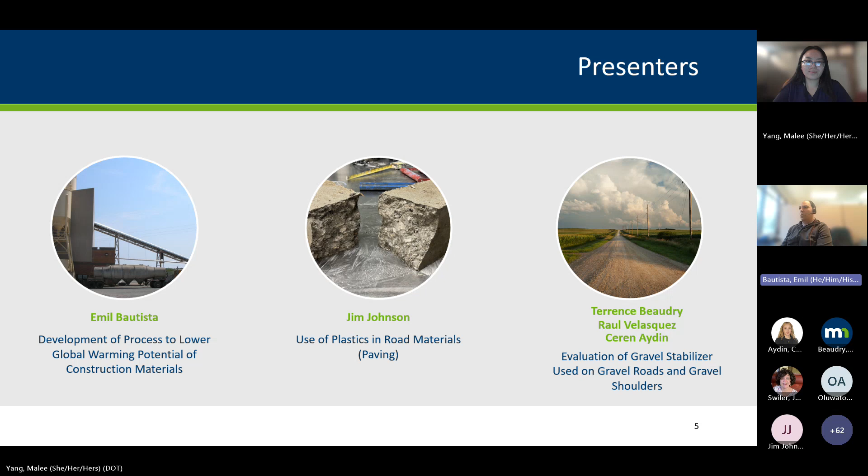Finally, we have Ceren Aydin, who is also a geomechanics research engineer at the Office of Materials and Road Research at MnDOT. Her research focuses on the mechanical and hydraulic characteristics of geomaterials, advanced geotechnical modeling, and the performance of pavement foundation and rigid pavements. Her role focuses on connecting research with practice to support innovative, practical solutions that enhance the durability and long term performance of transportation infrastructure. And with that being said, I now like to pass it on to Emil to get us started. Good morning. Share my screen.

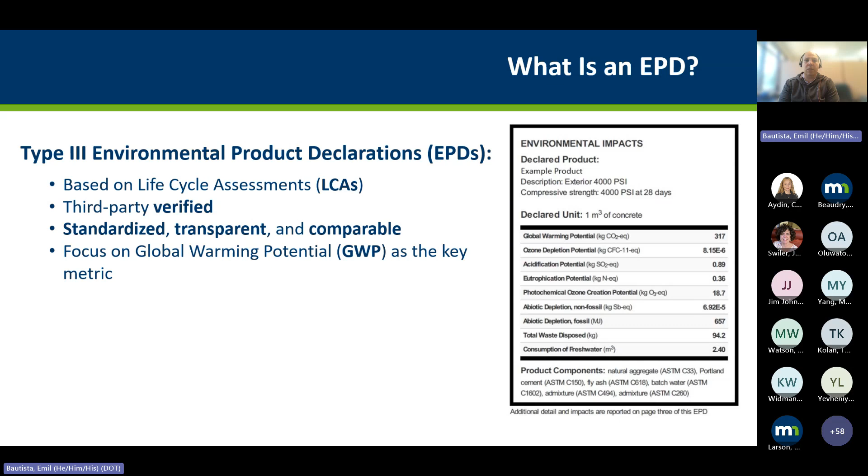It focuses on production. It looks at the constituent production, transporting those materials to the facility of production, and then producing the material. That's A1, A2, and A3.

There are other stages as well: the construction stage, which is A4 and A5. A4 consists of transporting material from the gate of the producer to the project site, and A5 is the construction operations. As I mentioned before, we are starting with EPDs, but the goal is that this can keep moving forward and looking at other stages in the cycle.

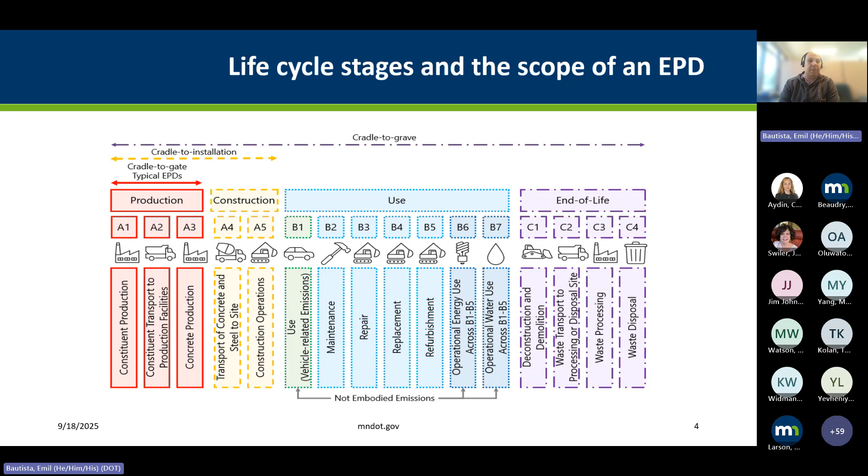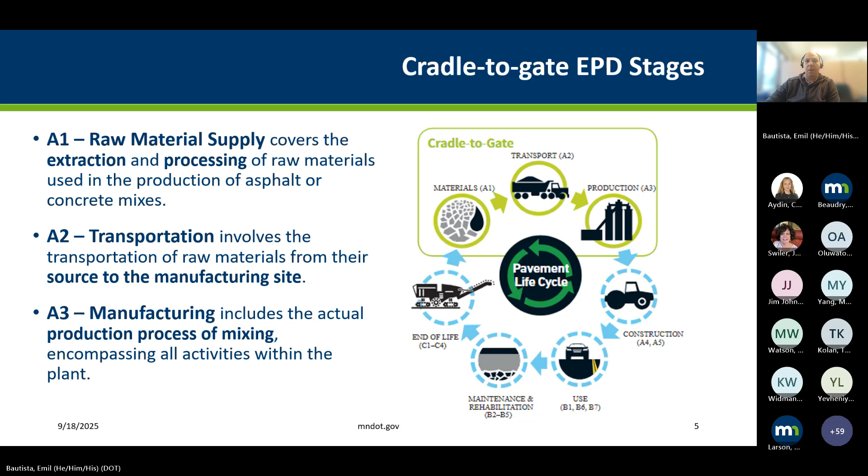So why is global warming potential important? Well, global warming potential is the most common metric in emissions reduction legislation, and is the leading indicator of environmental impact of construction materials. It is expressed in kilograms of CO2 equivalent.

For example, with methane or nitrous oxide, 1 kilogram of methane is 36 kilograms of CO2 equivalent. So what you try to do is normalize everything to CO2 measurements. CO2 and methane are what we call greenhouse gases.

Cement production is a major contributor of global warming potential. The calcination process releases a lot of CO2 when it's converted to lime, and this process leads to making clinker, which is the key ingredient of cement. Now, I don't want to put it in a way that implies it's simply a heavier global warming potential, and for that it's not good.

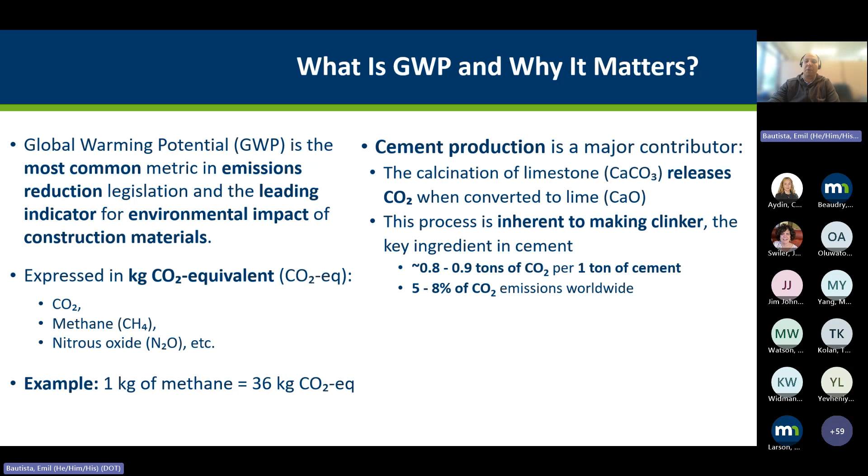Actually, what makes us also large is the amount that we use. We use quite a bit of amount to do our infrastructure, so that's another important point. And when we look at cement, for every ton of cement that we produce, we were emitting around 0.8 to 0.9 tons of CO2.

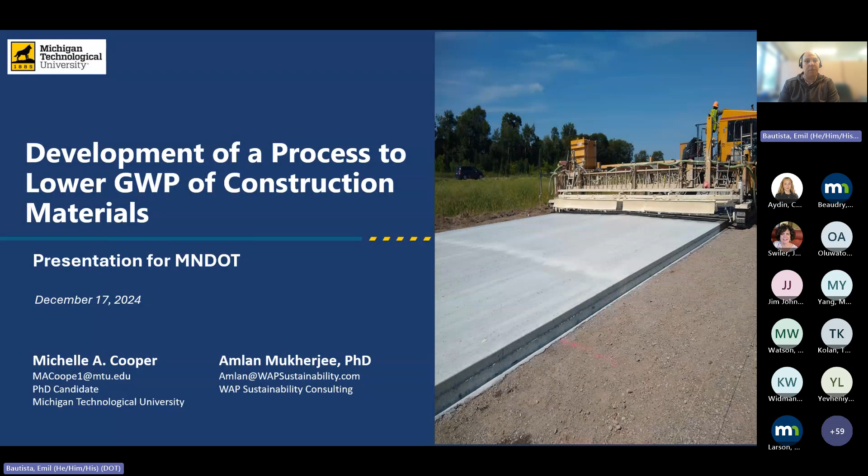Cement production is somewhere between 5 to 8% of the CO2 emissions worldwide. So that took us to do some research here at MnDOT to try to develop a process to lower our global warming potential in construction material, and start looking at how a framework will tie that with pay items. This research work is done by Michelle Cooper and Amlan Mukherjee. I'm mostly here just transferring the great work that they've done for us.

So what the project here was about was to support MnDOT's transition to low carbon concrete procurement by integrating global warming potential into project level decisions. The key objectives were to provide technical assistance for adopting well-informed EPD practice, and support global warming potential reduction targets by defining EPD acceptance criteria and looking at regionalized incentive thresholds.

It also looks at connecting EPDs to MnDOT's existing incentive systems. The scope of work was to propose a framework that will allow us to tie global warming potential into our procurement workflows, and be able to align with the Minnesota Buy Clean goals as well.

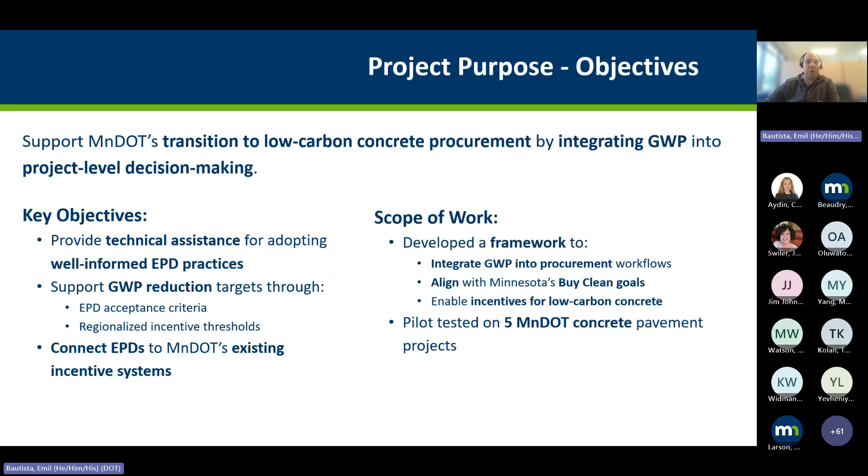During this process, we were able to pilot test on 5 MnDOT concrete pavement projects around the state. We were able to also accomplish some other important things with this research. We were able to collect around 850 published EPDs relevant to Minnesota concrete.

This research project also analyzed 32 MnDOT approved concrete mixes, collected data for A1 to A5. I want to make the note here, EPDs are A1 to A3, but we're looking at collecting also A4 and A5, and I'll explain that in the next slide.

Data from 5 real world projects, so we looked at 4 reconstructions and 1 joint repair. This helps us develop a life cycle information model to estimate and map global warming potential, also perform benchmarking analysis to establish those limits, and create a few tools that allow us to work with implementation of this research.

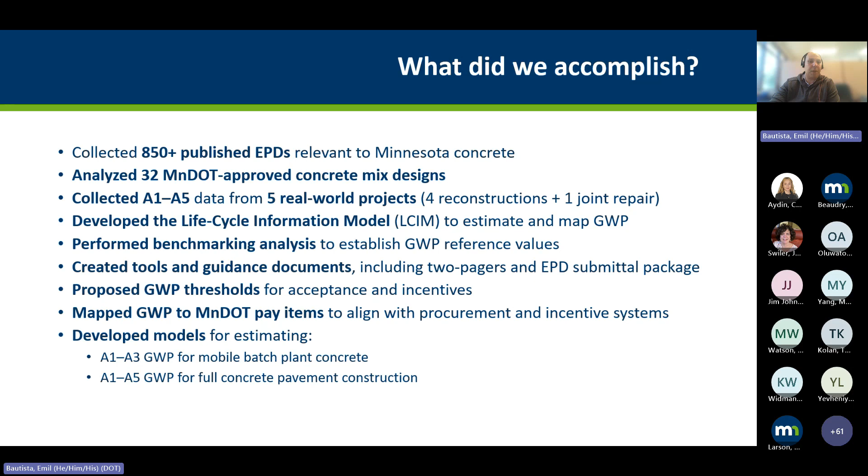Those are the 2 pagers and the submittal packages. We also have a proposed threshold for acceptance and incentive, and have mapped GWP to MnDOT pay items to align with procurement and incentive systems. We also developed models for estimating A1 to A3 for mobile batch plants, and A1 to A5 for global warming potential for concrete pavement construction.

So why am I talking about A1 to A5 now? When I said very clearly EPDs are A1 to A3, well, it's very simple. When we do our infrastructure, we don't necessarily procure a material. For example, for concrete, we pay for the placement of concrete.

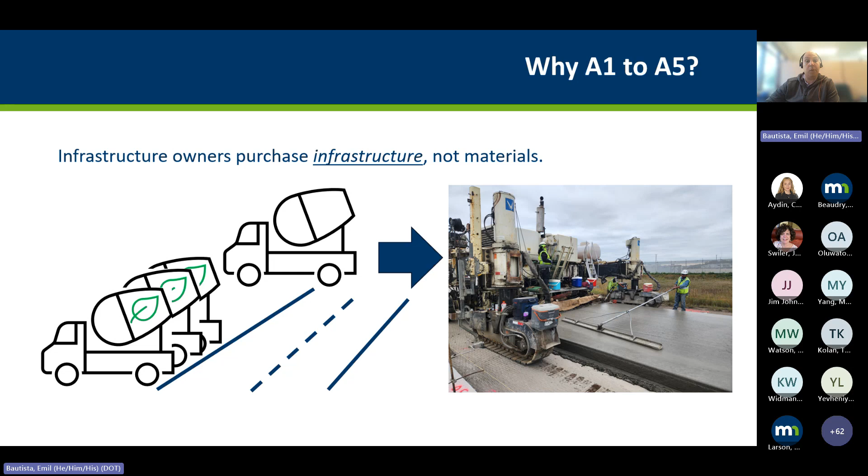So we want to be able to track as well the amount of emissions that are emitted in the construction process, in taking that material from a plant to a project site, and the amount of work that has to be done on the project site with equipment and other things, and estimate those emissions. Our legislation does not require us to do that, but we want to start looking at how that will look because of how it is tied into the way we pay for work.

These two pagers, you can find them on a website. There's a very nice website that they created with a lot of resources in there. You can find introduction to EPDs and any other resources. Some of these resources are coming from the federal government. I know now some of those websites might be inactive, but I think some of them are still accessible.

You can also look at Minnesota benchmarking efforts, those initial efforts, and look at what they propose for global warming potential acceptance and incentive thresholds. Like I mentioned before, they estimated what is the emissions of A1 to A3 for global warming potential for mobile plants, and A1 to A5 for concrete pavement construction.

The big part of this is looking at how can we integrate this EPD collection into procurement. So the EPD submittal package is just helping us ensure a timely and consistent environmental data collection to support benchmarking decisions.

One of the things they recommended was to maybe look at requesting this document two weeks prior to material delivery, or at the end of the project or at the end of each calendar year. This is something we're working with industry on. In the special provision language we're putting together, we're actually looking at a timeframe of 12 weeks after placement, just to get going and collect as many EPDs as we can in this initial stage. Some implementation notes recommended having a separate project line item, so there's an EPD collection type item in the contract, with information that can later be used to develop and regularly update benchmarking for threshold decision making.

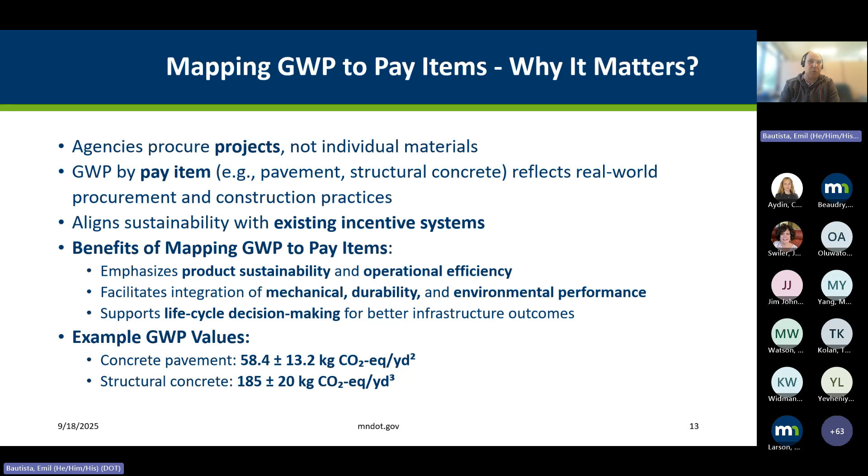So some of the key findings from this report, and some important mobile batch plant insights we got: at the A1 stage, the dominant factor is the cement - like I said before, we know that worldwide. A4 and A5 stages can add around 17% to the total global warming potential. We did not find any correlation with water cement ratio and GWP, which is a very important finding because water cement ratio is a quality assurance measurement for us internally, and we do have some incentive tied to water cement ratio requirements.

Also, the global warming potential can be different for different scenarios - mainline paving, a turn lane, or a joint repair - so we need to start looking more into those types of projects. We also have mobile plants in the state, and I've found a good amount of our producers have those types of plants, so they can be higher and more variable than ready mix production. A1 to A3 could be up to 66 kilograms CO2 higher, and the ready mix threshold limit may not apply. So we need more data from mobile plants to create specific benchmarks for this type of plant in the future.

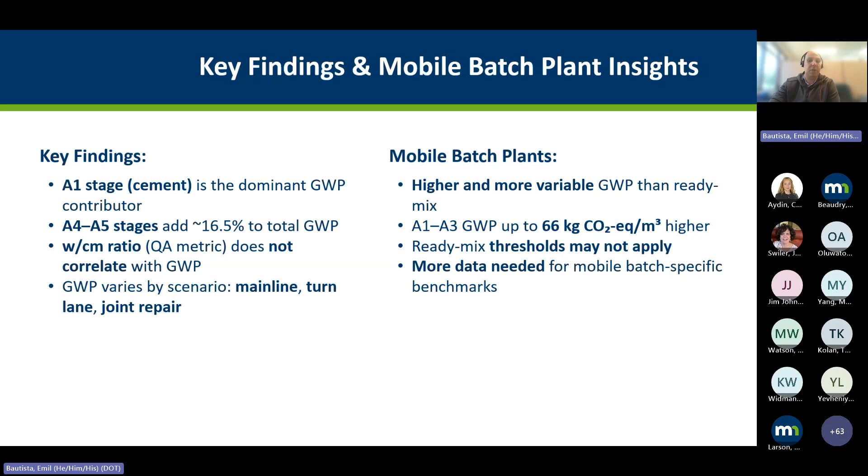Some other things we got were stakeholder concerns and future needs. From the producers and contractors side, they showed concerns about how we're collecting the data and where we're storing it, because they have mix design data tied to those documents and feel this could be proprietary data they don't want openly shared. So we're looking at ways to tackle this - how do we have a good procedure or process to collect data and store it efficiently?

We have to integrate this into spec and our quality assurance system, and incentivize recognition of mobile plant variability. They also expressed concern about how we handle mix changes, since they happen in real time. So we're working through those things with industry to make the needed adjustments to collect this data, and also trying to define what a minimum project size or EPD requirement could be.

So for the future, we need more information on mobile plants and precast concrete. We're looking at doing benchmarks by functional classes, like other states have done. They also recommended looking at an audit program for EPD verification and integrating quality assurance and sustainability data systems.

This work aligns very well with the Buy Clean strategy of the state and the direction we're taking. It supports Minnesota Buy Clean pilot projects and also provides a regionalized, data-driven framework and builds capacity for future GWP-based procurement. It supports the legislative requirements to set GWP thresholds by 2028, applying to concrete, asphalt, steel, and rebar, and allows us to lay the technical foundation to be in compliance with the state law.

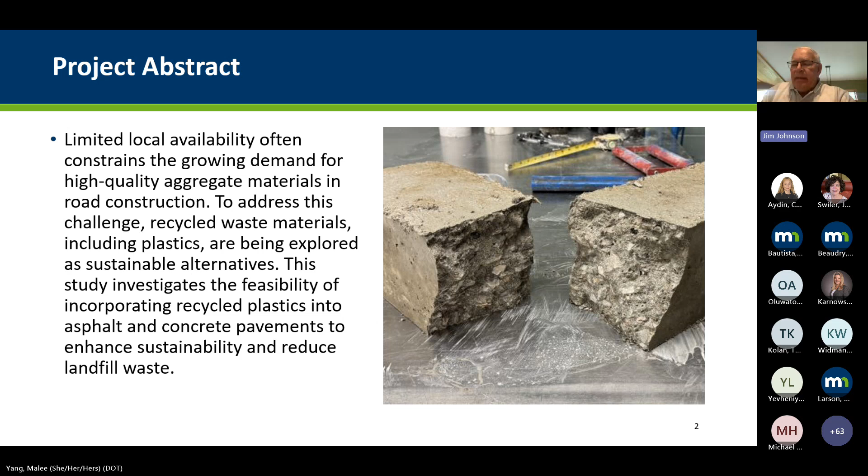Going through the objectives of this study: to survey the use of recycled plastics for roads in coordination with literature research, other studies, field investigations, or infrastructure projects already doing this. This study is hopefully just the next step in progressing towards utilization of recycled plastics into our asphalt and concrete pavements. Bullet number 2 is to evaluate the feasibility of using plastics in paving mixtures, and to work in partnership with MnDOT, since MnDOT provides a lot of the standards we used in this study in terms of specifications and mix designs. So again, work in partnership with MnDOT to provide a summary of the work being done both locally and within the pool-funded studies, which are studies being done elsewhere, both nationally and internationally.

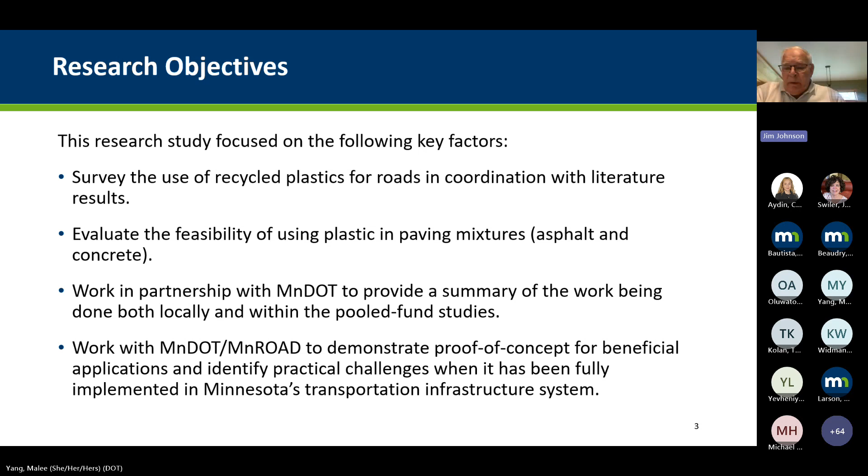Hopefully in the process and in the future we'll continue to work with MnDOT and MnROAD to demonstrate the proof of concept for something economical and beneficial both environmentally and cost-wise, to save some of our virgin aggregates or be able to replace them in the future.

The second chapter of this final report talked about the summary of the use of recycled products. What I want to share here, just very quickly, are the different types of plastics that are in major manufacturing and use in today's economy and our worldwide use of this.

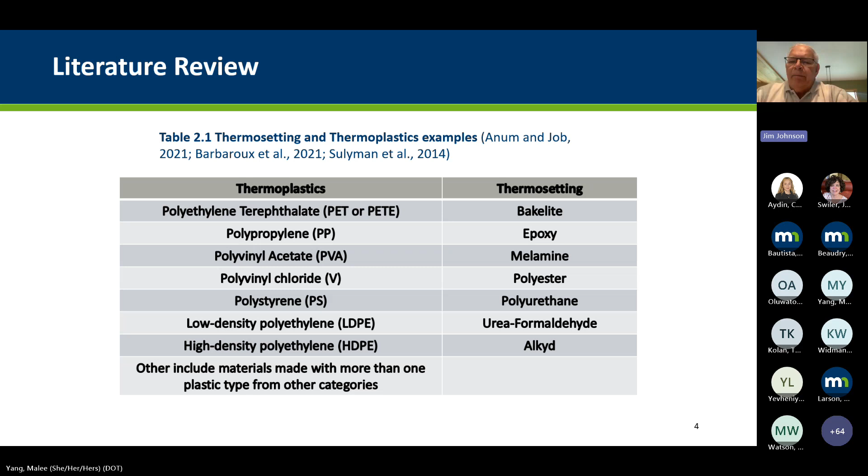If you'll pay attention, because it will appear in some of the following slides, I always have a problem with acronyms. So here you see whether it's PET, PVC, PS, or LDPE, just so you have a reference back as to what those acronyms actually stand for. Just showing a portion of the large variety of plastics, thermoplastics and thermosetting that are available on a worldwide market. Next slide, please, Malee.

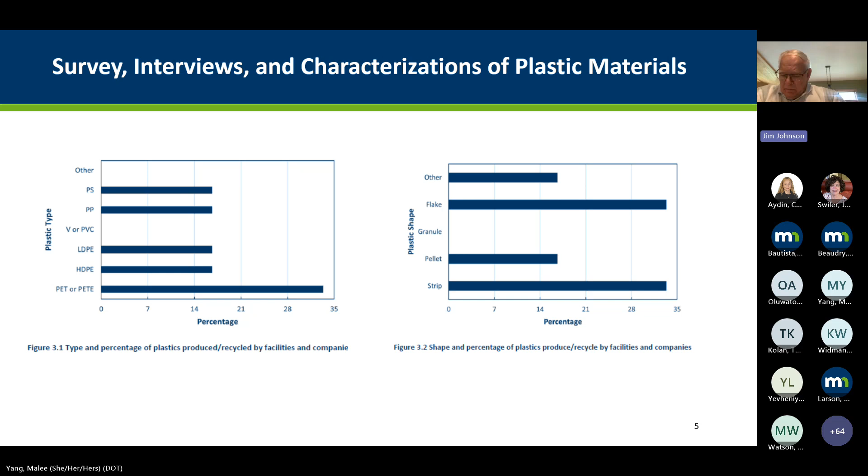Let's see, next slide please, Maylee. Chapters 4 and 5 that we'll be going to now are really the crux, or the feasibility study, of the study. Chapter 4 is on the utilization of plastic waste in asphalt paving. Then as we go on to chapter 5, which I'll get to in a few slides, we'll focus on the use of those plastic wastes in concrete material as well.

They analyzed in the study, though it doesn't show up in what I'm presenting this morning, both a dry process, which is introducing each of the materials, the aggregates and the bituminous, in their separate components, more like a batch plant bringing in each of the elements of the asphalt mix, as opposed to a wet process where the plastics are introduced into the bitumen mix, which already includes the aggregate. For this testing and study, they utilized the wet process.

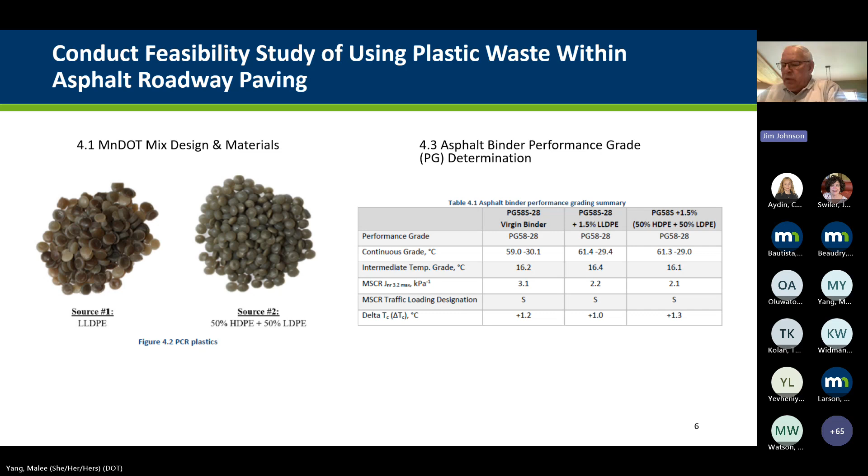Next slide, if you would. Thank you, Maylee. Again, this shows some of the results of the different types of testing done on these three types of mixes: the virgin mix, as well as the other two that incorporate the two plastic sources.

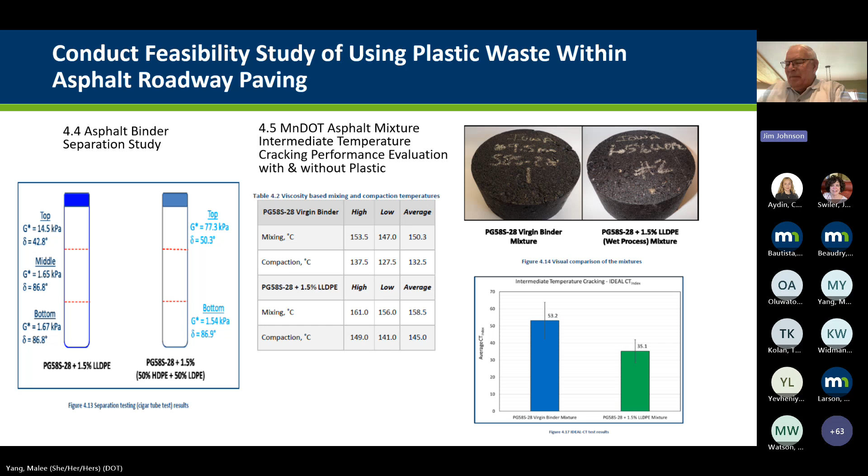One on the left is an asphalt binder separation study. Then you see the intermediate temperature cracking performance evaluation with and without the plastic in the middle. On the right, you see the visual picture of the pucks from both sources—the virgin mix, and then the first source using the linear low-density polyethylene, just showing the appearance of those. Below that are the testing results from an IDEAL CT test. Again, they're beyond my expertise, so you can ask Tom Burnham what they mean. Next slide, please, Malee.

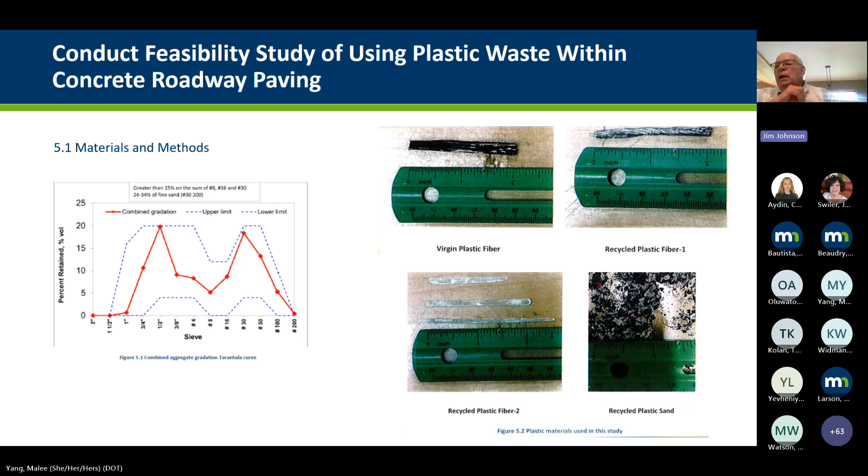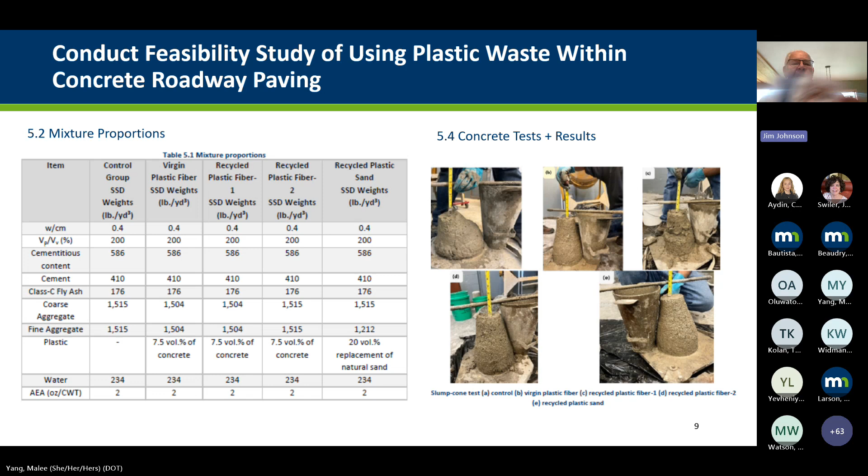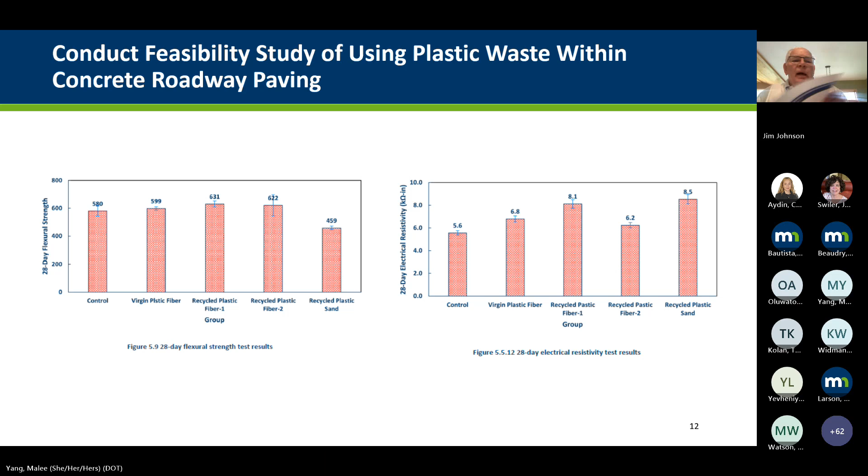Next slide, please, Malee. The executive summary is usually up front, but I wanted to use it as a conclusion to provide a little oversight, going from the abstract through the study and what our findings and results were, in a more concise process. Let me read along with you on these.

The asphalt mix designs were developed using the wet process method, with various plastic concentrations tested for their impact on binder performance, cracking resistance, and moisture susceptibility. Concrete mixtures incorporating recycled plastics as aggregate replacements and additives were analyzed for compressive strength, flexural properties, shrinkage, and workability.

Summarizing the results: test results on the plastic modified asphalt indicated reduced cracking resistance of the mixture when post-consumer plastic—not virgin material from plastic factories, but recycled material—is added to the binder using a wet process, as compared to the same mixture with the same binder without plastic. So there was actually a reduction in performance in the case of the asphalt mix.

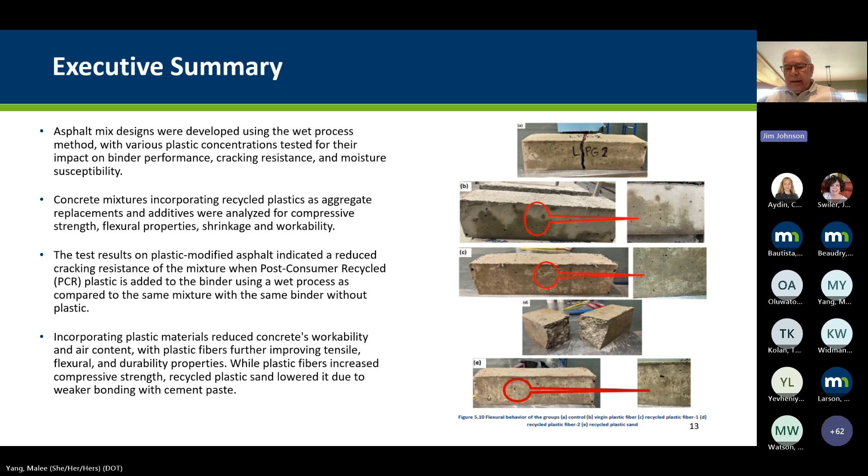The study's chapter 6 talks about research benefits and potential implementation steps that can be utilized in moving forward with further, more refined studies. Chapter 7 concludes with conclusions and recommendations for future studies. And with that, I have completed what I need to present at this point. Thank you.

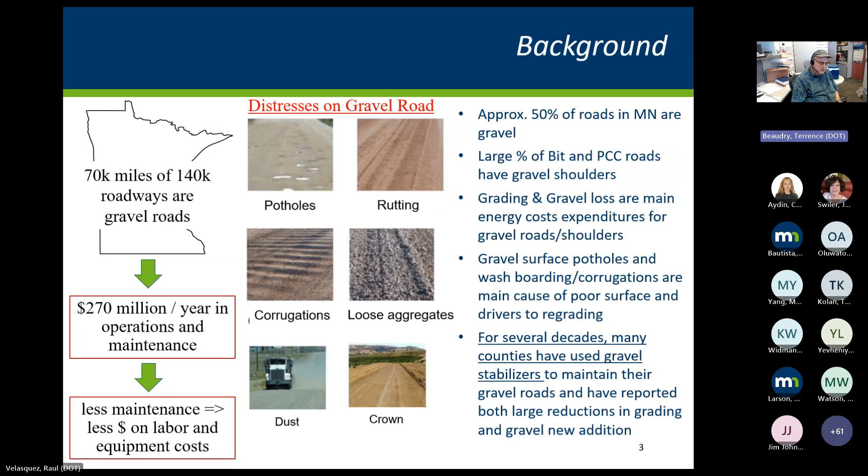So we're trying to quantify what impact gravel stabilizers have on maintenance, because this translates into less money spent on labor, equipment usage, and gravel. The intent was to quantify those improvements - the cost benefits as well as the environmental benefits, both fuel and CO2, used with those gravel roads.

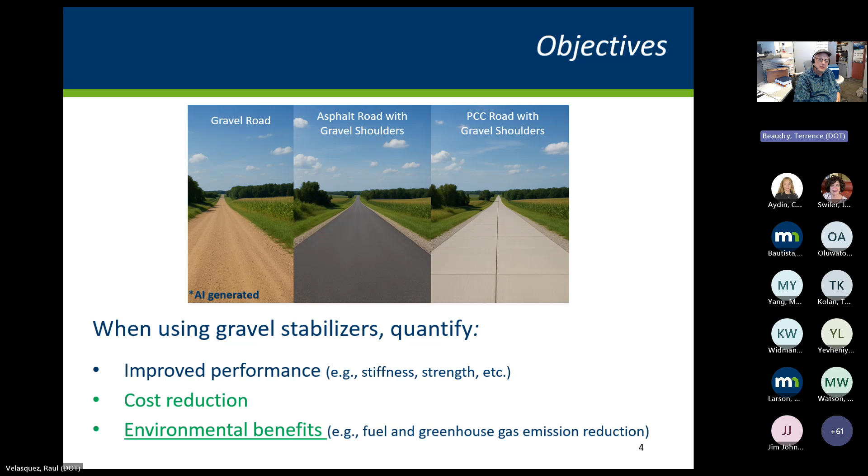Here's a nice illustration: we have a gravel road on the left. If you look at a gravel road, there's usually about 2, 3, or 4 inches of crushed gravel on top of a compacted soil subgrade - it's not just the gravel, but a compacted subgrade with 3 or 4 inches of gravel on top. Many of our rural bituminous roads have a gravel shoulder anywhere from 2 feet to 8 feet in some cases. And of course we do have some gravel shoulders on concrete roads too.

With that, I'll turn it over to Raul. Thanks, morning everyone. In terms of field studies, the research team selected study locations in 5 counties: Polk County, Itasca, St. Louis, Cass, and McLeod. These counties were selected to represent a wide range of traffic levels, climate, and gravel types.

It's important to note that the stabilized road sections in each county were monitored to assess mechanical performance, to do cost analysis, and environmental impact.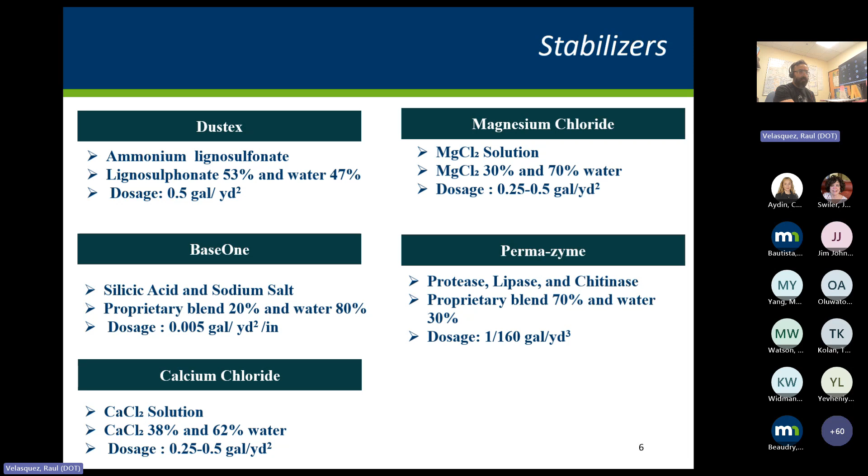We'll show some high-level results in the next few slides about that. Field testing was conducted on a total of 28 sites, so a pretty comprehensive study, again across 5 counties. The most used stabilizers for this study were the standard ones - calcium chloride and magnesium chloride were the most commonly applied stabilizers. This test matrix is pretty diverse and comprehensive, allowing us to compare performance of these stabilizers under different conditions, dosages, and construction methods, which accounts for the variability we face across the whole state.

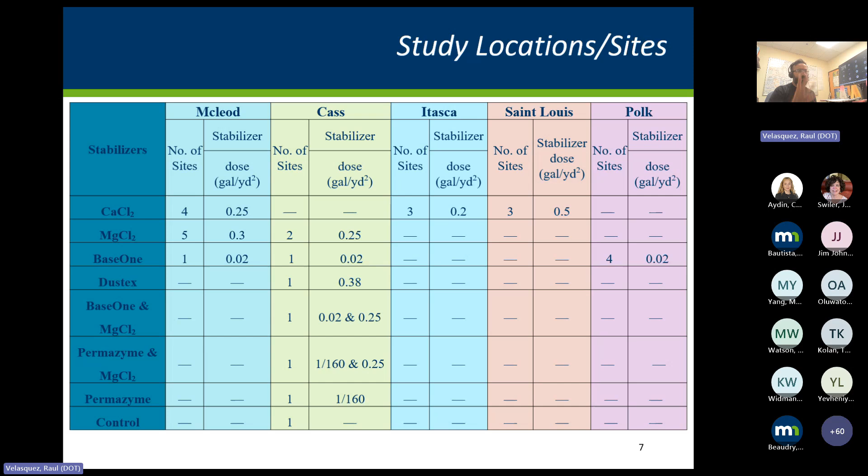This is an example of the sections we constructed as part of this study in Cass County. Seven sections of a quarter mile were built using the stabilizers shown in this schematic. The treatments included the use of Dustex, BaseOne, Permazyme, magnesium chloride, and some combinations of those.

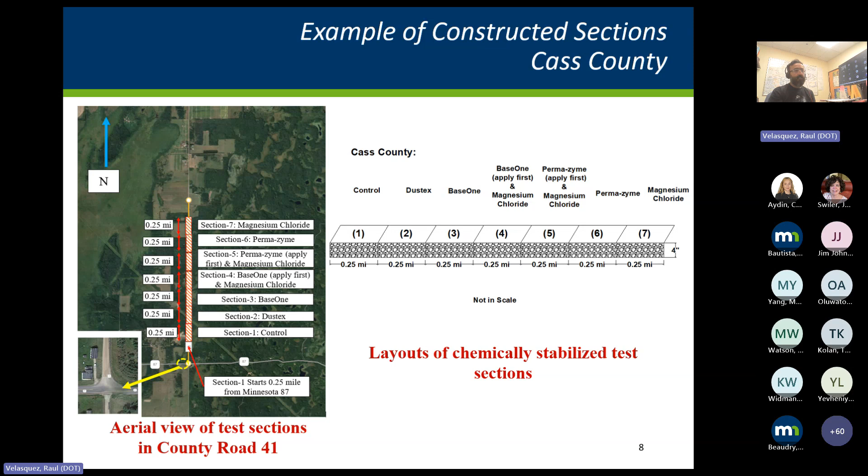Here's an example of the construction processes that counties use for applying this type of chemical stabilization. First stage is ripping of the granular material, then application of the stabilizer via injection, and then mixing, grading, finishing, and compaction.

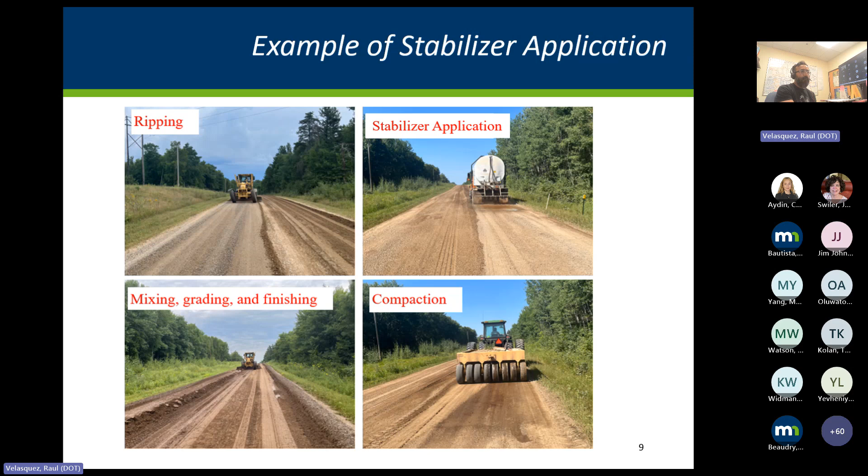Now I'm going to provide a big picture summary of what we have so far. Again, this study has not been completed, so it's still in progress. In terms of mechanical performance, there has been a lot of research done for past decades on this topic. I'm just going to briefly mention some of the positive results, and then I'll give it back to Ceren, where she's going to talk about the environmental impact and the positive results we're getting from that analysis.

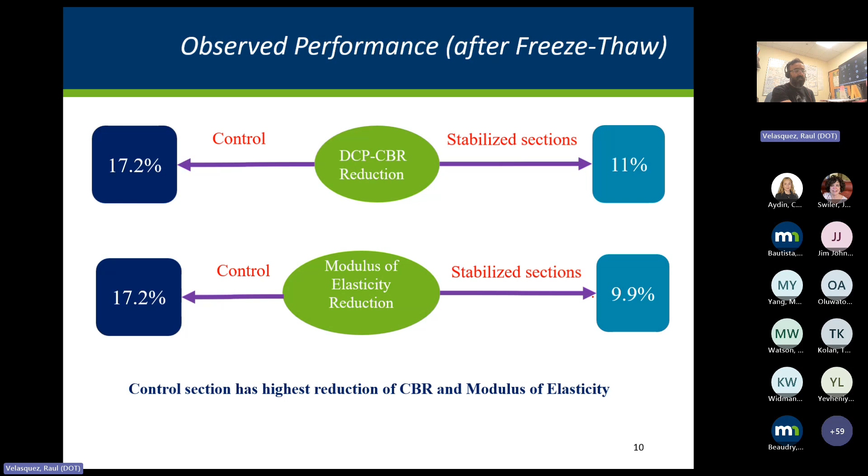In terms of mechanical performance, stabilized sections after being subjected to a freeze-thaw cycle, after going through a winter and spring cycle, show positive results in the sense that performance is reduced less when you have stabilizers. The impact on shear strength, measured using DCP, shows a reduction for control sections of about 17.2% on average, whereas stabilized sections only have a drop in performance of about 11%. In terms of stiffness measured by the LWD device, control sections show a reduction after a freeze-thaw cycle of about 17%, while stabilized sections have a reduction of 9.9%. So there are some positive results regarding mechanical performance.

In terms of cost savings, researchers have shown that some additives reduce cost per mile by about $4,000, for the BaseOne. The classical standard calcium chloride provides savings of about $3,000. So it's showing some encouraging, beneficial results in terms of finance.

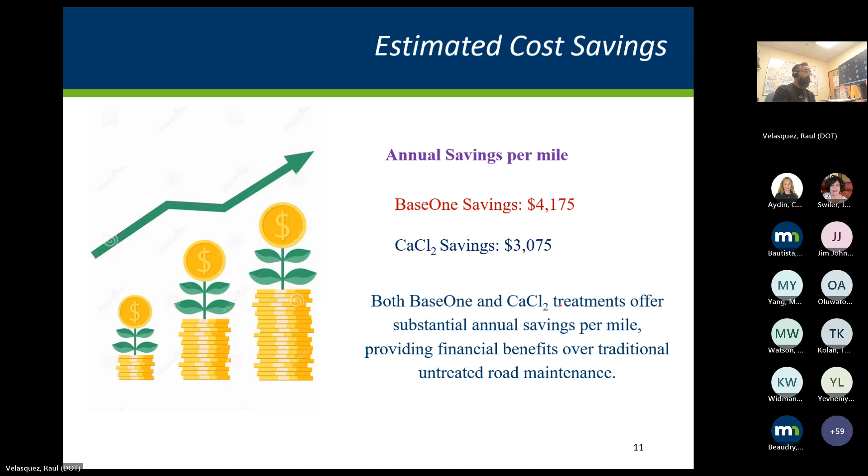Now, in terms of environmental impact, I'm glad that Emil talked about what global warming potential is, so it simplifies our discussion here. Stabilized sections show a reduction in GWP of up to 4.6 kilograms of equivalent CO2 per cubic yard. In terms of cost savings, up to $5 per cubic yard of material placed. Also, the research team measured water quality and toxicity of these materials. All of them meet US EPA water quality standards, and so far the testing results show no acute toxicity to any aquatic organisms from using these stabilization materials.

And now I'm going to give the floor to Ceren so she can talk a little bit more about the environmental benefits, a little bit more detail on that, and provide more examples. Ceren? Thanks, Raul.

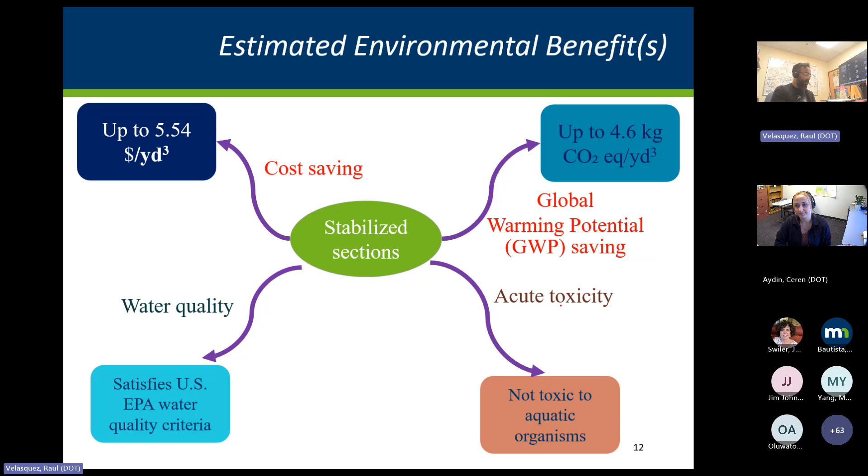So we thought it would be good to show some examples of how we actually got these numbers that my colleague Raul just shared with you. Before introducing these small examples, I want to emphasize the scope of the study. We had 5 counties and 64 sites of maintenance data, corresponding to over 300 miles of gravel road data, coming from 2005 to 2023. Big thanks to county engineers - this shows good collaboration between the researchers, agency owners, practitioners, and the counties that enabled the research team to get this information. So we have increased confidence in the results we're about to show you.

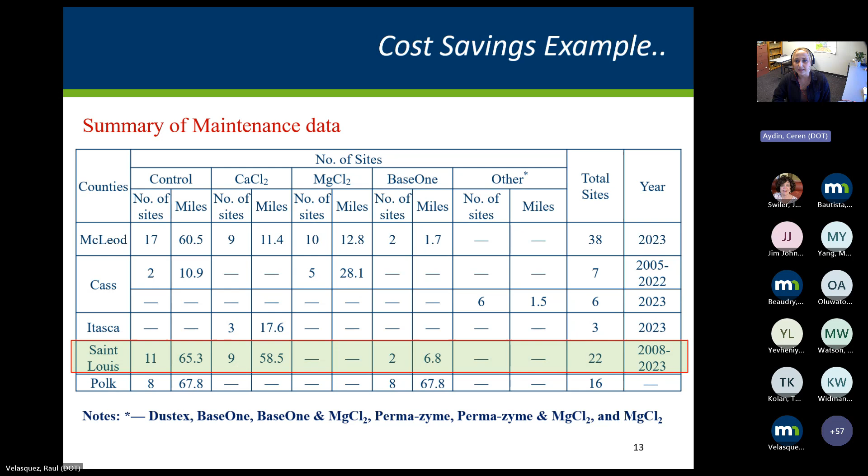So we have 5 counties, and we wanted to choose Saint Louis County for this presentation - let's go to the next one, Raul - because this is one of the counties contributing the largest mileage of data.

Right now we are looking at the maintenance cost for this county. Although it looks crowded because there are 11 sections in total using BaseOne and calcium chloride, we are practically looking at the before-stabilization and after-stabilization maintenance cost per mile per year, including equipment, labor, and gravel costs. We can see that overall the cost of maintenance is decreasing after stabilization, regardless of the stabilization type used.

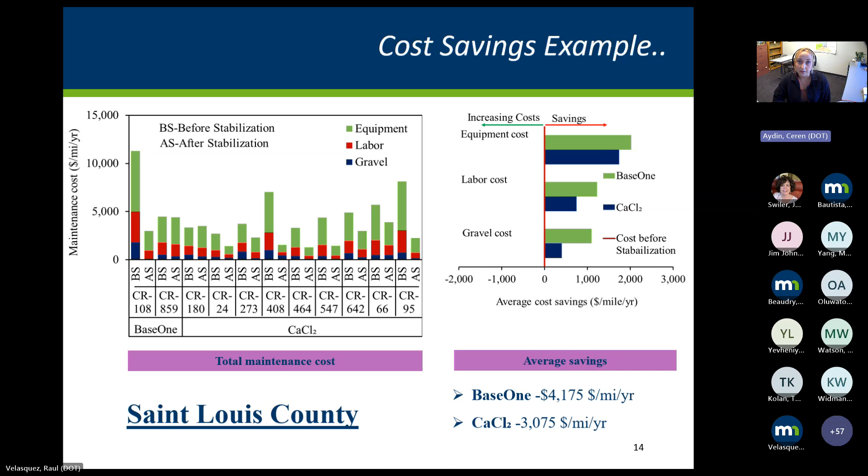If you look at the same data a different way, in terms of average savings, we can see the breakdown on the right-hand side for BaseOne and calcium chloride. Again, for equipment cost, labor cost, and gravel cost, we can see that BaseOne is yielding higher annual savings compared to the traditional one, although both show substantial savings when you look at the long-term economic impacts. We can go to the next one.

So this is a cost savings summary again, but in a bigger picture. We just talked about the yearly maintenance costs at the top, and this chart also has the public use savings and the production and major rehabilitation breakdown for the different types of stabilizers: magnesium chloride, BaseOne, and calcium chloride, compared to the untreated control.

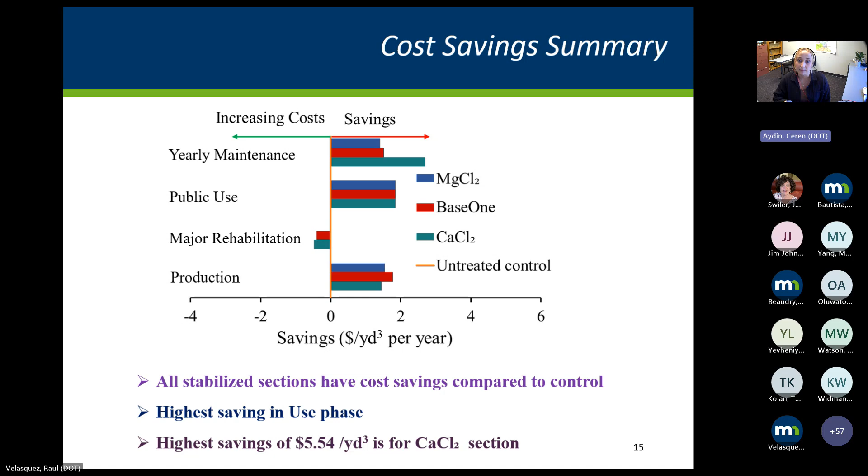With these results, we are seeing that all stabilized sections, regardless of the type of treatment used, have cost savings compared to control. We can also say that the highest saving is in the use phase, where the public gets the most benefit out of these treatments. We can go to the next one.

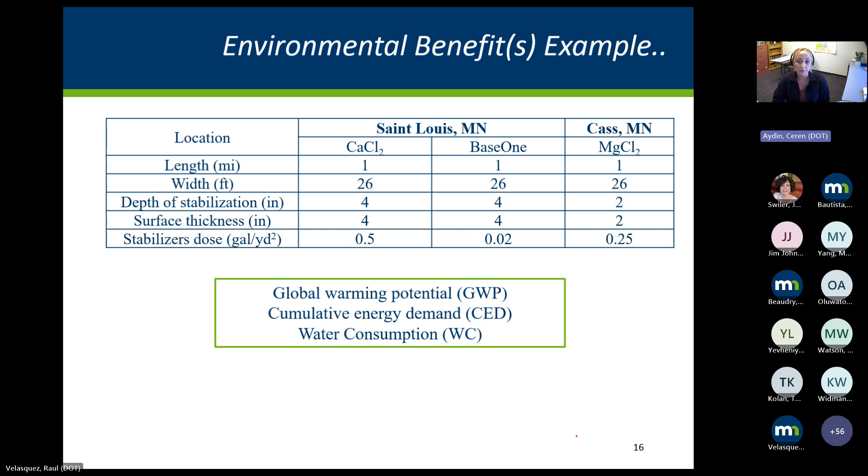The first part I just covered was about the economical side, and now we're going to look at the environmental benefits. This is a comparative study between Saint Louis and Cass counties considering all types of treatments we've discussed: calcium chloride, BaseOne, and magnesium chloride. The researchers looked at 3 key indicators of environmental impact: global warming potential, cumulative energy demand, and water consumption.

It's important to know that this comparative study modeled a mile-long gravel road with 4 inches of thickness, either stabilized with these materials or untreated, which is named control. It's also important to mention that the researchers included each step of this gravel road construction, from raw material to production, from major rehabilitation to public use, and then yearly maintenance and end of life.

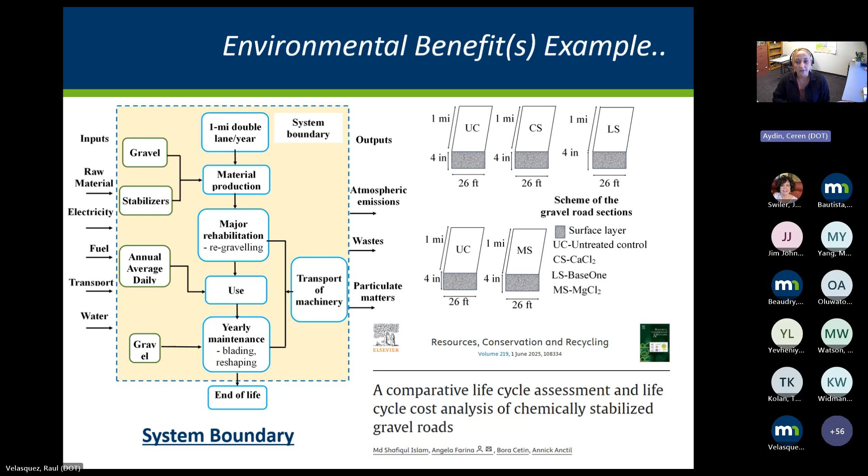This flow chart, which looks a little complicated, is showing us our inputs on the left-hand side and the processes that this gravel road goes through within its lifetime. By inputting these, we obtain outputs, which we're going to look at to see what the benefit is for us here.

To be able to do this environmental analysis, we have inputs. Again, these inputs are coming from extensive maintenance data over 20 years, or around 20 years, of field observations and site observations that counties have shared with us.

So we are looking at these entries, the use of gravel or fuel, for a unit of 1 mile of gravel road. Although there are many numbers here, it's important to mention that if we look here, we'll see that the regraveling frequency under major rehabilitation is dropping for any kind of treated gravel road.

And if you look at the maintenance part at the bottom, we are seeing a huge and significant drop in the use of gravel for routine maintenance. This part is really important for us.

First of all, we are conscious that our sources are depleting, meaning we don't have as much gravel sources as we had before. So we need to be aware that these materials are limited, and when they're limited, they get more expensive because it is difficult to reach them.

Also, the hauling distances, bringing material from location A to location B, creates a big environmental cost and economical burden, because within close proximity of this gravel road construction there might not be enough gravel to support the entire construction. So it's really important to see this huge drop in the use of gravel, which also translates to less fuel consumption when you use the treatment, regardless of the type of treatment materials you're using.

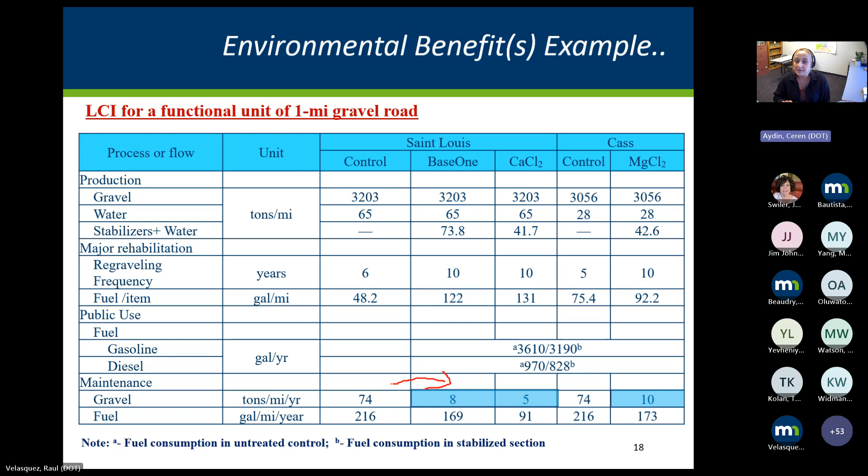And this is coming from the real data from our counties. Again, no material is perfect, meaning that when you are producing these sustainable materials and providing sustainable solutions, you're also leaving marks on the environment. The way to see it is by looking at the global warming potential and the cumulative energy demand.

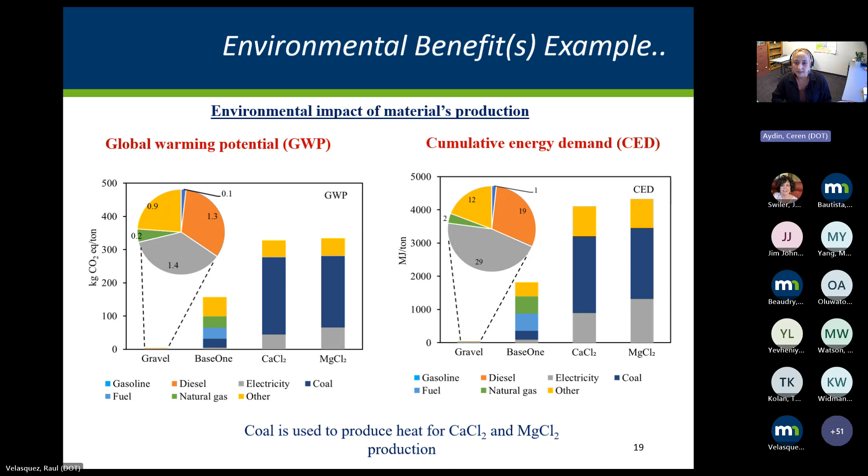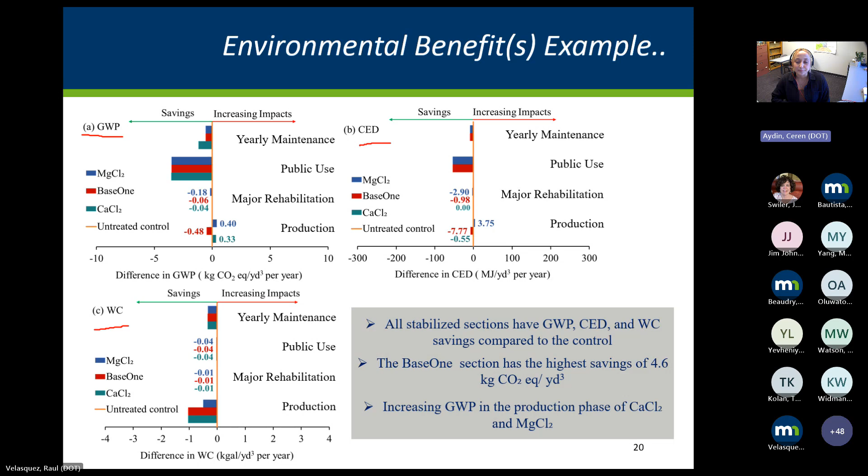If we look at more details, we can see that BaseOne is actually superior with the highest savings. With that, I'm going to leave the floor to Terry to wrap this presentation for us.